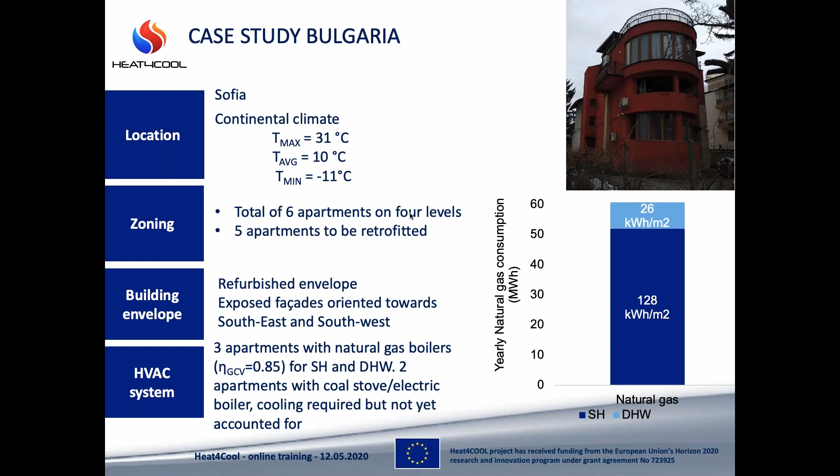On your right side, you can see the natural gas consumption, which is measured at 128 kilowatt hours per square meter, 26 kilowatt hours per square meter.

So the heating, ventilation, and air conditioning system will consist of 2 electric heat pumps, PCM, phase change material heat battery unit, and a photovoltaic system. A centralized heat pump system was chosen because of the higher efficiency and lack of space inside the apartments to put a heat pump in the boiler room.

The heat pump of 10 kilowatts is provided by Heat4Cool company, and it's directly connected to the PCM storage. The heated water is drained through a pipe system to 2 gas boilers. The heat pump unit is installed at elevation minus 2.40 meters.

Three phase change material units, also called heat battery, are installed in the vicinity of the heat pump unit. After the heat pump unit, two thermal loops are formed, one to the heat batteries and the other to the heating system. Circulation to the thermal circuit for the thermal batteries will be performed via a circulation pump.

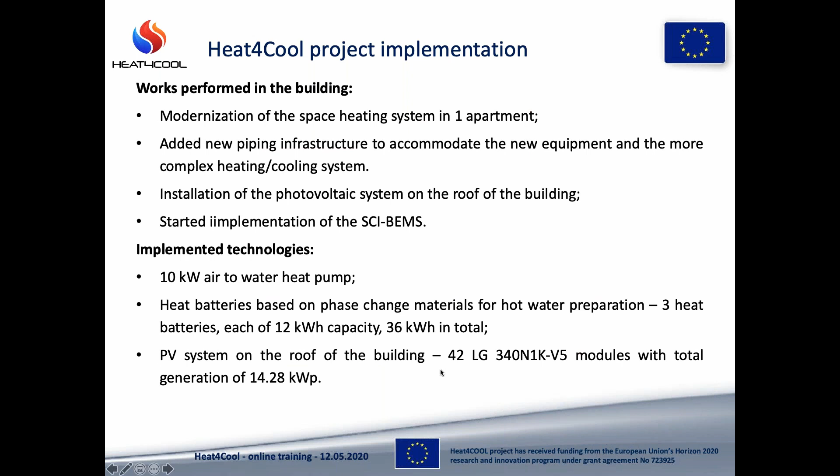It's difficult to move the detached slides. Yeah, I can do it. So we were here. The next one, please.

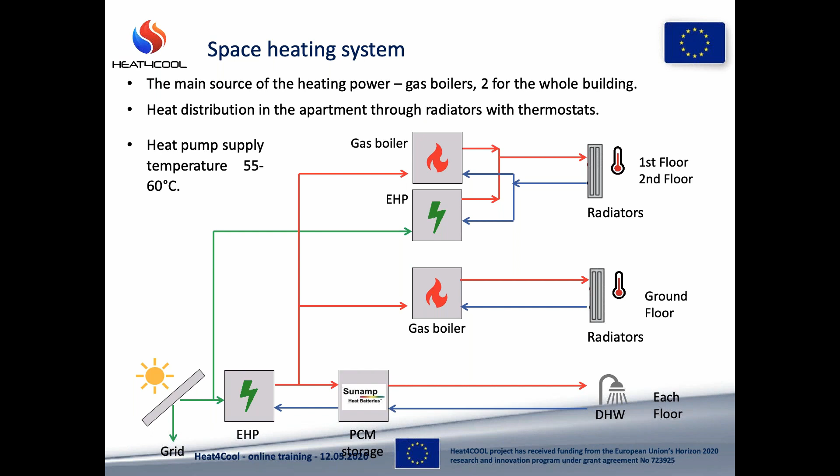On this slide, you can see some of the components of the space heating system, part of the pipe infrastructure and a box in which the 2 valves are housed. We focus on 2 of its main features: independent work of the circulation pumps and boilers in the apartments. The valves and circulation pumps are controlled by a separate controller.

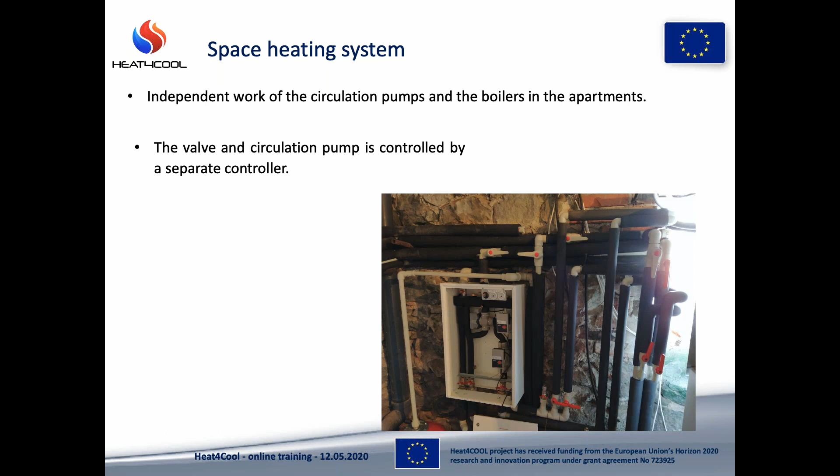The main characteristics of the hot water preheating system are displayed here, namely heat batteries connected in 4 couples, heat pump and domestic hot water circuits in Tichelmann system, charging of the heat batteries controlled by Siemens PLC, managing the circulation pump based on the data from temperature sensors in the heat batteries.

In the pictures on the right, you can see the basement heat pump and the heat battery situated right next to it. A photo of the controller can also be seen on the left side.

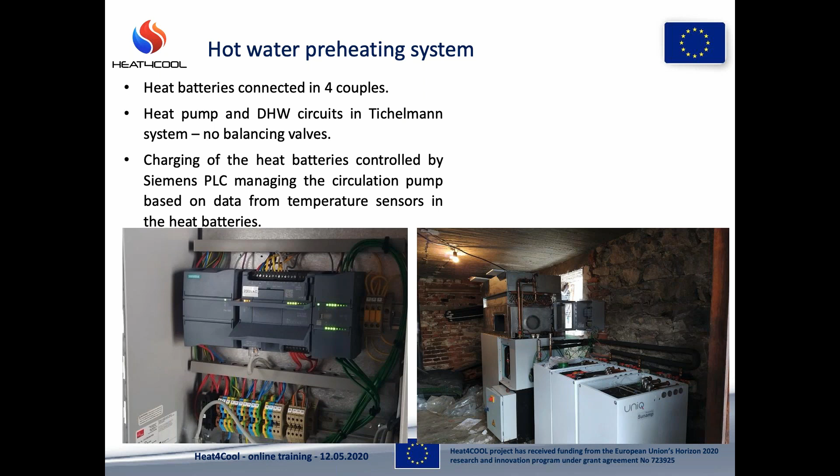Here you can see how the heat pump, the measuring heat pump above, is installed. The 10 kilowatt heat pump is 1 unit device for indoor use. Connection to the building with pre-insulated cross-linked polyethylene pipes.

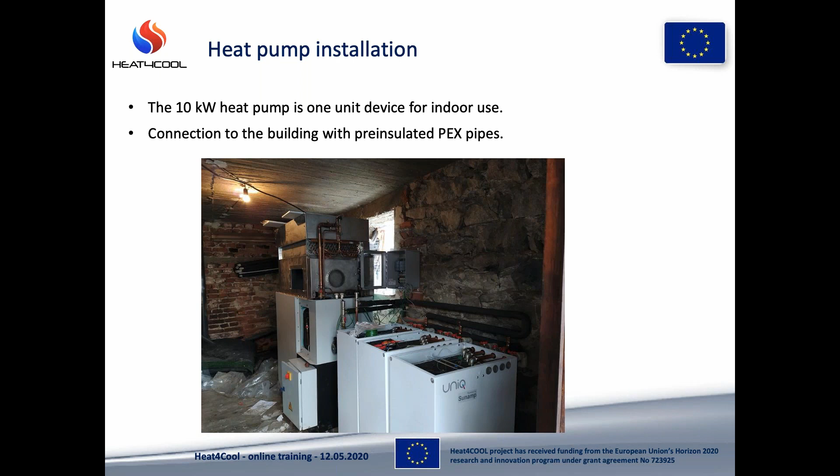This slide shows a diagram of the energy strings of the photovoltaic system. Each string is represented by 14 photovoltaic panels. For each individual string, we have 1 inverter of 6 kilowatts, which is connected to electricity meters measuring the generated electricity. The next slide.

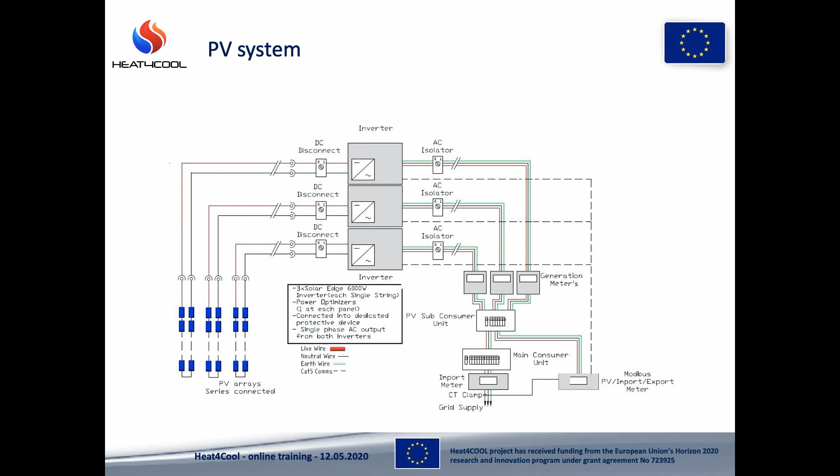The solar photovoltaic system is 14.28 kilowatt peak capacity, comprising 42 LG modules. 33 modules are mounted on the southeast facing sloped roof, and 9 modules are mounted on the flat roof areas using Renusol mounting clamps and A-frames, fixed using hang bolts secured to the roof substructure.

You can see these models on the next slide in the picture. Yes.

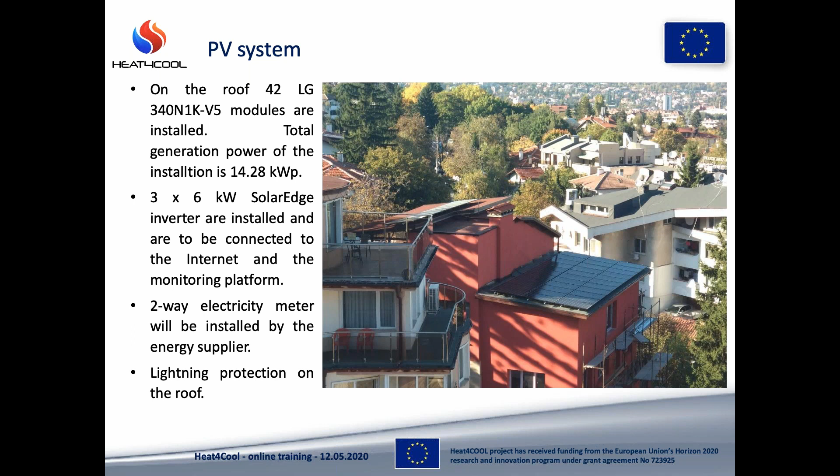Some words about the solar photovoltaic system. 3 SolarEdge 6 kilowatt inverters will be used to convert all power from direct current to alternating current, to allow maximum possible generation from the system and enable all power to be used for either the heat pump, rest of the building, or to be exported depending on present demand. The SolarEdge P500 optimizer system will facilitate much greater power generation from the system compared to either a string inverter or direct DC power system, due to the heavily shaded nature of the roof and the limited range in which the heat pump can receive direct current power inputs.

The set inverters are to be connected to the internet and the monitoring platform. A two-way electricity meter will be installed by the energy supplier. Besides, lightning protection will also be provided on the roof.

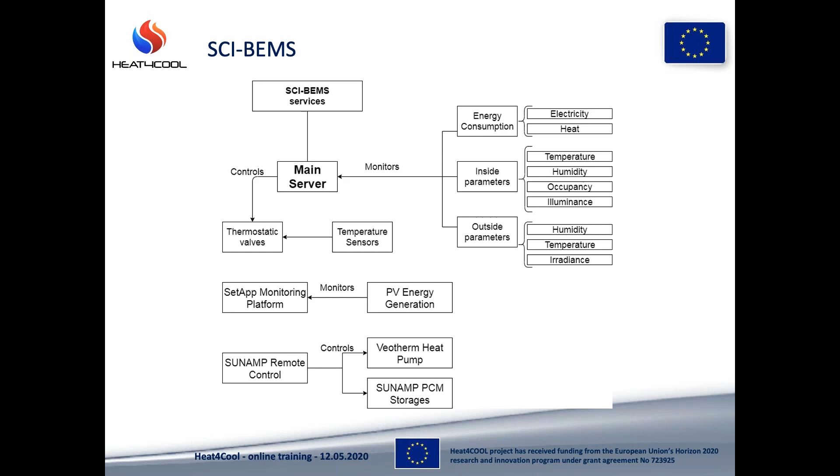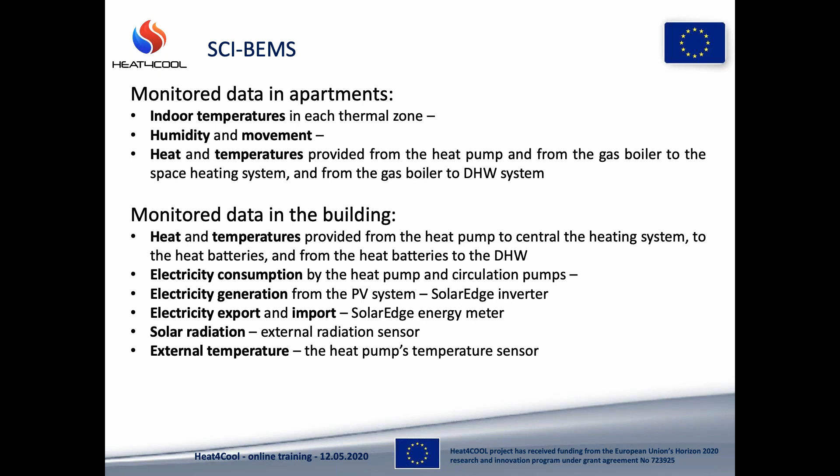Monitored data in the building are heat and temperatures provided from the heat pump to the central heating system, to the heat batteries, and from the heat batteries to the domestic hot water. Electricity consumption by the heat pump and circulation pumps, electricity generation from the photovoltaic system via the SolarEdge inverter, electricity export and import via the SolarEdge energy meter, solar radiation via the external radiation sensor, external temperature, and the heat pump's temperature sensor.

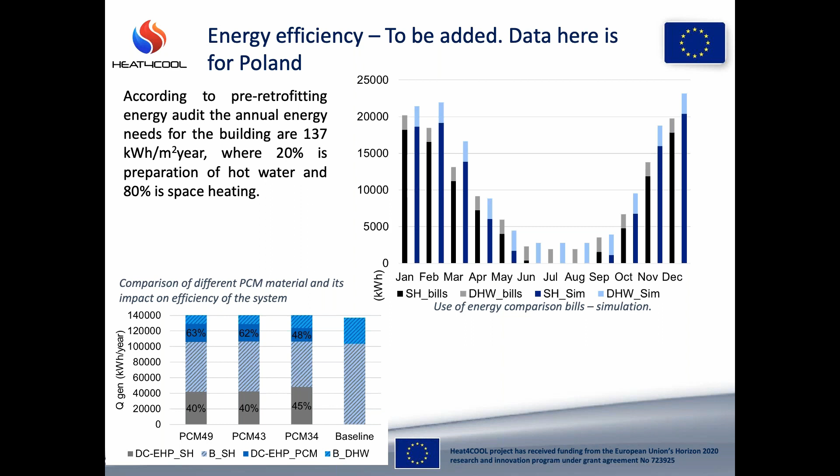As a generalization, we can say that the simulations of these retrofit projects show that we can achieve a 30% reduction of primary energy consumption as well as reduce carbon emissions by 30% respectively. With the planned partial sale of part of the generated electricity, we can recoup the investment in the project, so to name it a break-even point, for about approximately 10 years.

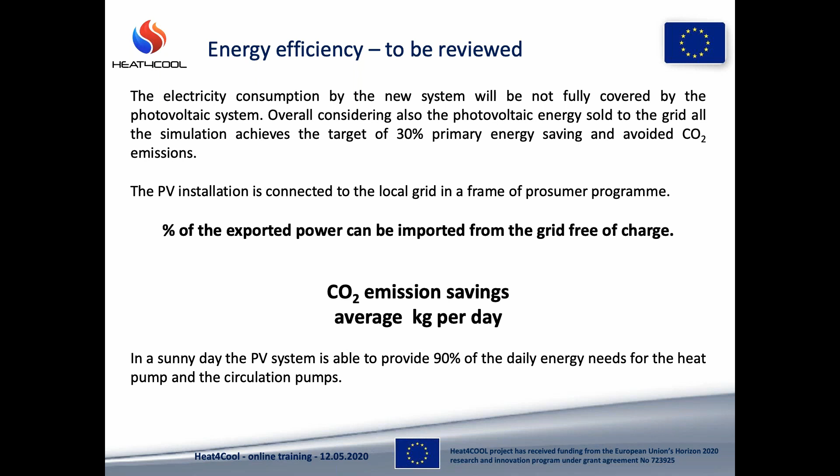So that was in broad outlines the presentation of the demo site in Sofia, Bulgaria. Thank you for your attention. I remain available for any questions or inquiries about our demo sites. Thank you for your time.